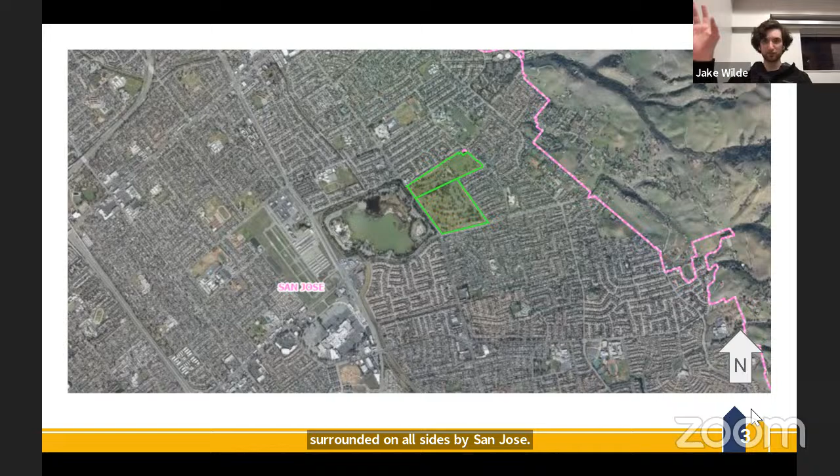And then Pleasant Hills. If you don't know where the site is, it's a site in East San Jose. It's an unincorporated pocket of Santa Clara County, surrounded on all sides by San Jose. It's next to Lake Cunningham, you have the Reid-Hillview Airport over there, Eastridge Mall. Pretty busy area, a lot going on.

Some background on the site: the golf course that has been closed now for some time operated from 1960 to 2004, so it's been closed for around 20 years now. The site has been pretty much empty since, hasn't had any other use. It was used for a brief period for grazing some animals for a time.

It was previously under this development policy called the Evergreen East Hills Development Policy, which, due to traffic concerns, sort of limited the development in this part of San Jose to projects that couldn't have more than 35 units to a site, and you had to meet some very abstract and complicated criteria to be able to reach that number even.

Then just in 2022, the current applicant of the proposal for Pleasant Hills submitted an amendment to the general plan asking to designate this space as mixed-use neighborhood and mixed-use commercial, from its current designation of private recreation and open space.

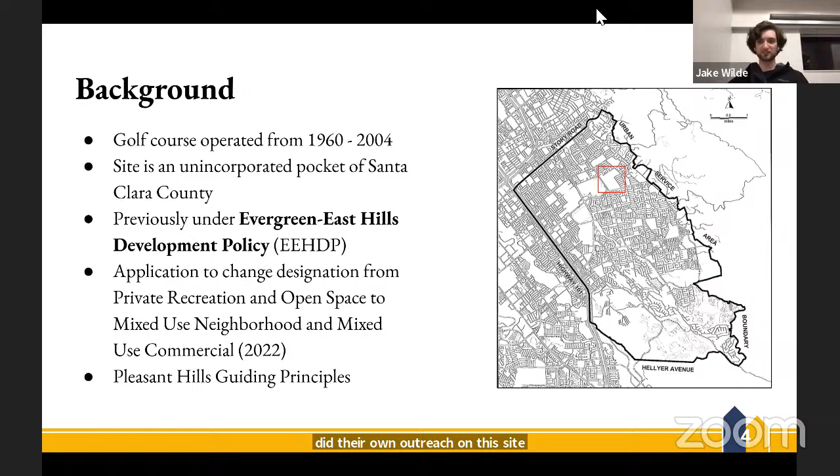And then just this year, the city of San Jose did their own outreach on this site to formulate what they called the Pleasant Hills Guiding Principles. This process took place all during this year. There was a series of meetings, and the purpose of this document was to go out into the community, get feedback from residents, and then make a document on the city's end that basically was a collection of principles to guide the vision for Pleasant Hills.

So this is the community's vision for this site, this is what they wanted to see. They got information on all sorts of different things: density, the affordable housing component, parks, transportation. This was done over the course of 2 rounds of workshops.

And then the guiding principles went through the Planning Commission and City Council, and they will be used in some manner to assess whatever that final proposal is. When the project comes to hearing at the City Council, they will be using this document as some sort of criteria by which to assess the project.

And that gets us into the proposal for this site. So there's a map of the land uses over there on the right. The site in total is 113.5 acres.

The developer is proposing 1,716 units, 342 of those are affordable. There's a teeny little mixed use component, and it also comes with these 3 new public parks. One of these is a linear park running the length of White Road along Lake Cunningham there.

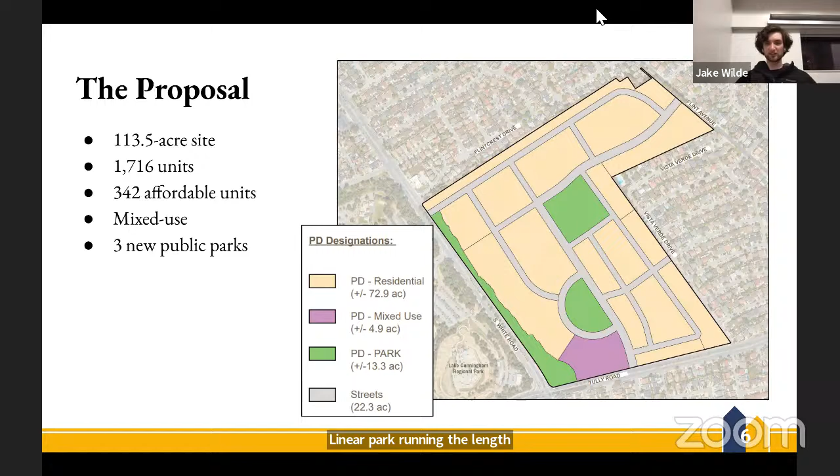Here's the breakdown of those units. We do not have information on the bedroom counts for the multifamily housing, but as of now, there are 359 single-family dwellings that will be on the site, 655 townhomes - what they called stacked flats, also called clustered townhomes - 360 of those, and then 342 mixed-use multifamily units.

Those are, if you're looking at the map here, the purple structure labeled with a 3 in the lower portion of the site there, on the corner of Tully and White Road. And in total, that's 1,716 units.

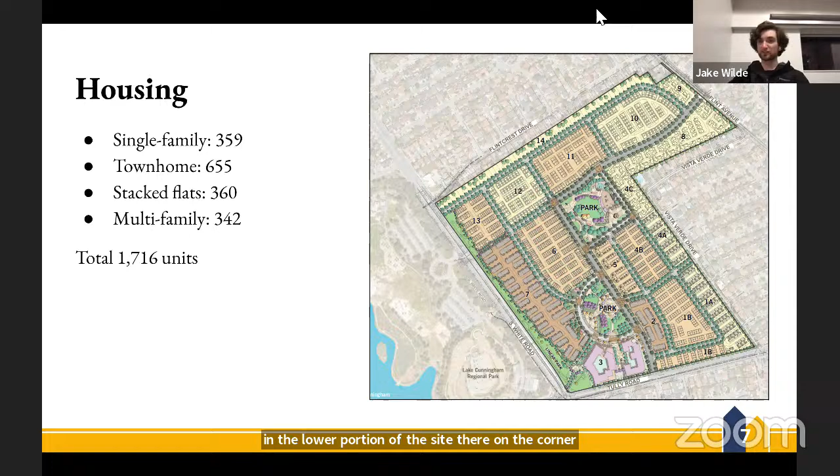This is just a breakdown that we can come back to later if anyone has more in-depth questions about where those are throughout the site. It basically breaks all of that down.

The project is early in the design process, so they don't even have any sort of renderings for this project yet submitted to the county or the city. But they did include these wonderful photos for references of what it might look like. So this was their reference for single family homes, and then of course, the reference for townhomes on this site.

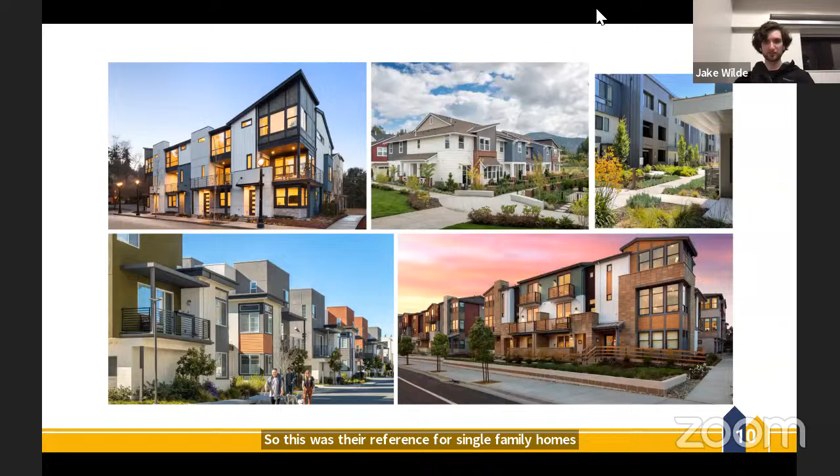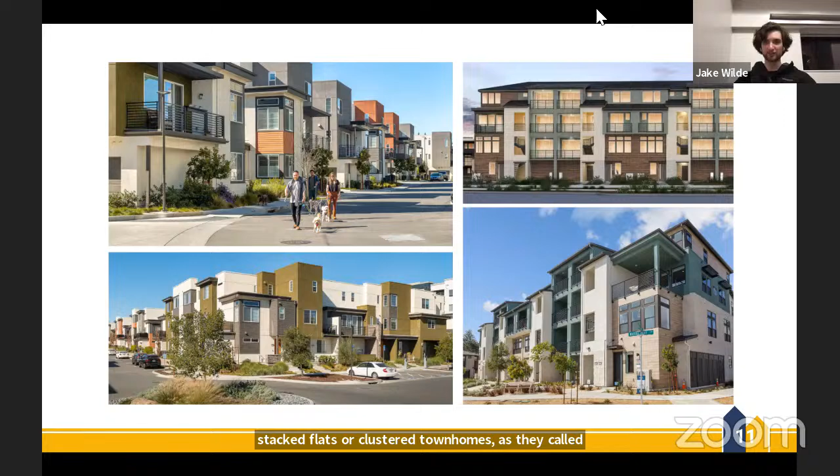And the reference for the stacked flats or clustered townhomes, as they called them—a familiar sight in San Jose. This was their inspiration board for what that mixed use multifamily component will look like, again very familiar for those of you who've seen a mixed use project in San Jose.

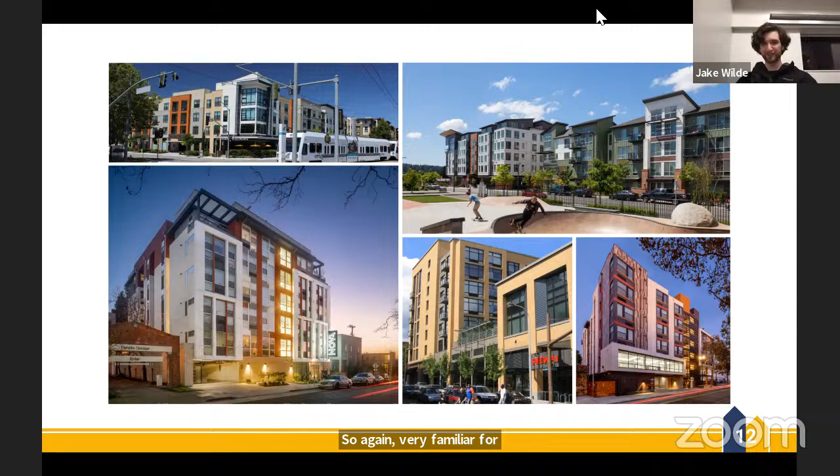In terms of affordability, the project as currently submitted to the county is 20% affordable. So 342 of those units are affordable rentals, while the remaining 1,374 units are market rate for-sale units. You can see the breakdown of household incomes for those units: 228 for very low income, and 114 for low income households.

The commercial mixed use component will have up to 50,000 square feet of neighborhood serving retail. In their proposal they list things like restaurants, coffee shops, grocers, offices, medical uses, higher education, and community gathering spaces as what they envision for this neighborhood serving retail component.

Here's a breakdown of the parks: 13.3 acres of public parks, new public parks with this. While it is currently under the general plan designation as private open space and recreation, the site as it exists now isn't currently used for that. So these would be 3 public parks: one linear park on the Lake Cunningham side, and then two more central plaza parks.

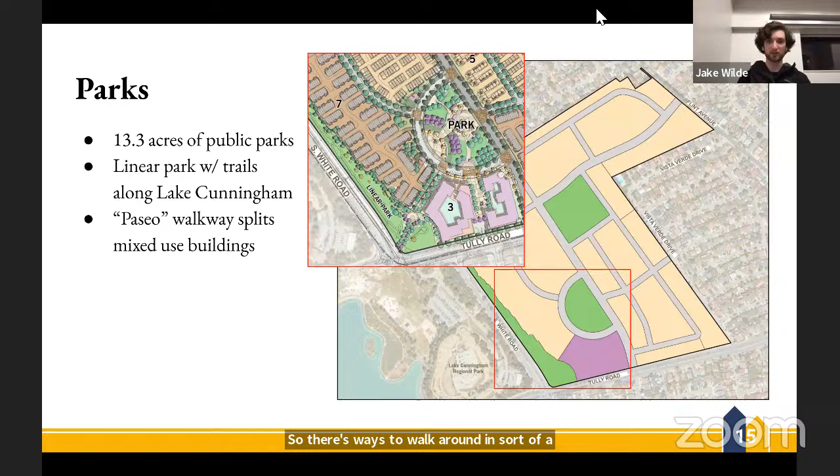As far as things go, that's all the information we have on this project right now—that's what the developer has submitted to the county. There's some process where they've submitted this project both to the county and the city at this time. It's important to note the city has already done a lot of outreach and engagement on this site, drafting the guiding principles for the site. So a significant amount of work on the city's behalf, and hopefully the developer will continue to provide further details to the city and see how those line up with the city's current expectations for the site.

I'm good to go ahead and take any questions you all might have about this site. There's maybe a couple of details that I didn't include in these slides, but it captures almost everything.

And if you'd like, what is the number of, like, multifamily, single family homes, townhomes, and mixed use? What is the exact number again? Yeah, so single family standalone dwellings, that was 359.

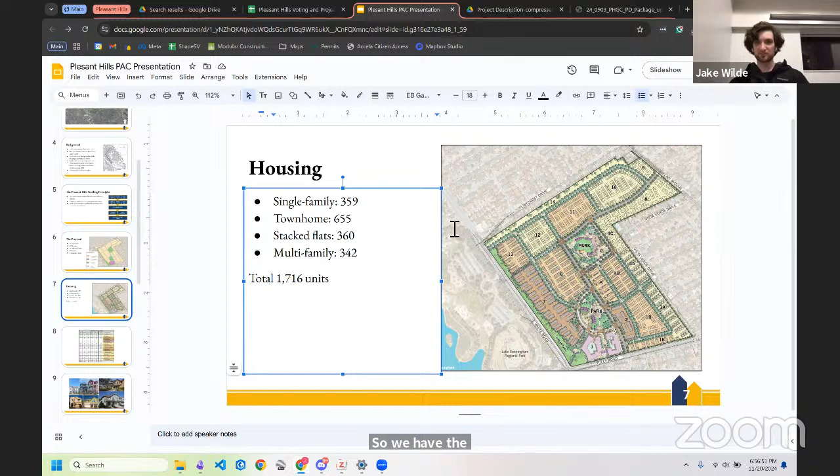I can actually bring up the plan sheet here. It has this breakdown on the right, but I went through and did the math, so I think this is a much better summary of the exact typology of housing you're seeing here. So we have 359 single family homes—that answers your question, Sandhana—and I can leave this up if you'd like to take a look at the breakdown of where all these units are and the types of housing here.

The overall gross density of the site is 21.9 dwelling units an acre. So I'd say that's on the lower side of infill projects that we look at here.

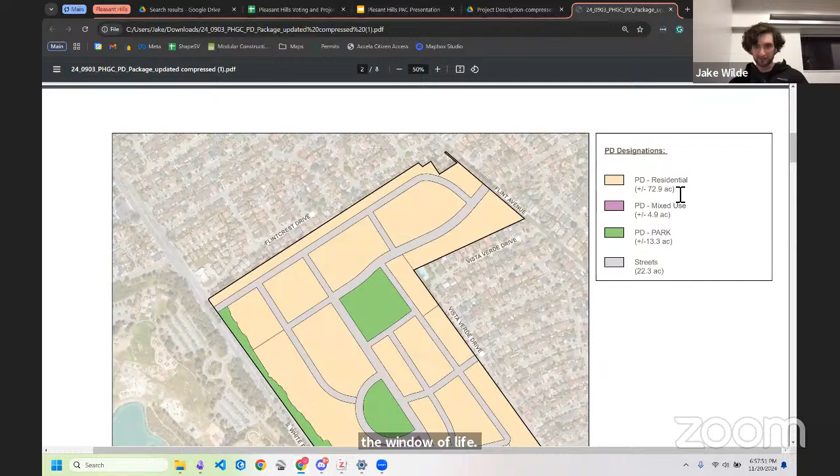You said 21.9, Jay? 21.9, yes. What's the math on that, can you tell me? That's the dwelling units per acre here on their residential unit allocation. So we had 72.9 acres for residential on the other slide—is that not right? That previous slide says 72.9 acres of residential. Here from their own summary, residential is 74.4, and their gross density breakdown is 21.9 dwelling units an acre. It seems like it's a little higher than that, but anyway, okay.

Is this little spreadsheet the one that they provided? Yes, this is what they submitted to the county, and this is what I was able to get from them. I thought it was lower, Casey—I thought it was 15 to 17.

Okay, I could do some reverse math and see if they're doing it with the total site acreage, the 113.5 acres, or if they're just doing that of the residential space.

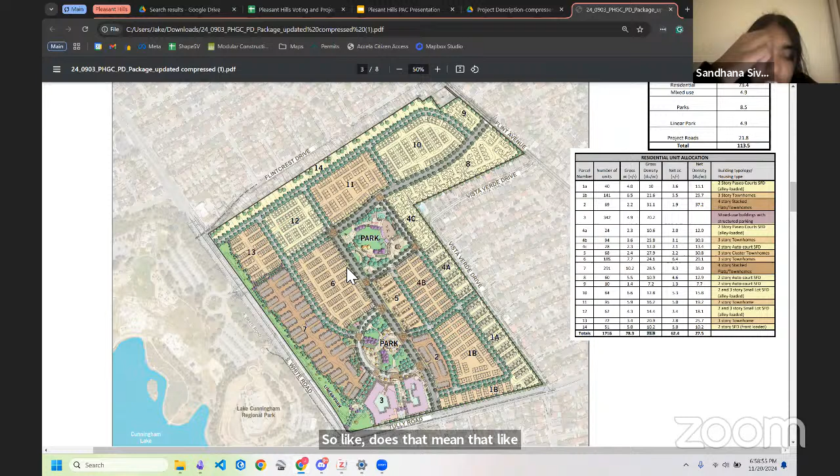Oh wait, so this is surrounded by single family home neighborhoods. Does that mean the outer part will be lesser density compared to the inner part of the project? Yeah, that's how they've laid out the housing typologies. The yellow along the edge of the site, interfacing the existing single family homes, those are all single family dwellings. And site 12 here, if you can see my mouse, is also a single family dwelling, that yellow color.

I think if you take the overall acreage, 113, and divide by those units, you get like 15 units an acre. However, you do have to account for parks, roads, mixed use. So looking at just the residential development acreage and dividing that by the units is how I would look at it. And even then, even if it comes in at say 21 to 23 units per acre, I do think it would be great to see more density on that acreage.

So I guess that's where I would start with my feedback. They have a pretty high percentage of single family homes, and you all know the Bay Area in general and San Jose also has to create more housing. So I think it's a great development, I like the idea, but my biggest feedback would be around getting more density in the residential development, maybe fewer single family homes as well.

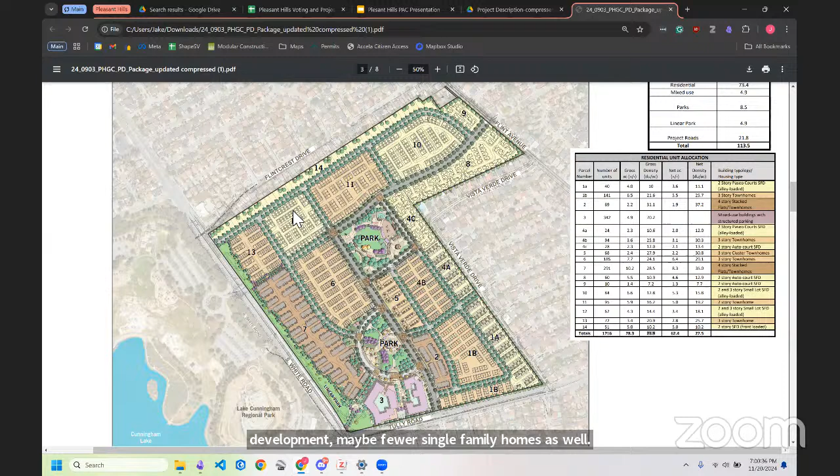Well, I would like to add that the developer has not found a way to reduce the VMT, the amount of cars that the site would create. They have not considered any alternative option. One viable option is VTA's express bus service, currently used by corporations, but most likely it could be used by the developer to ferry people to and from Eastridge and whatever site is voted.

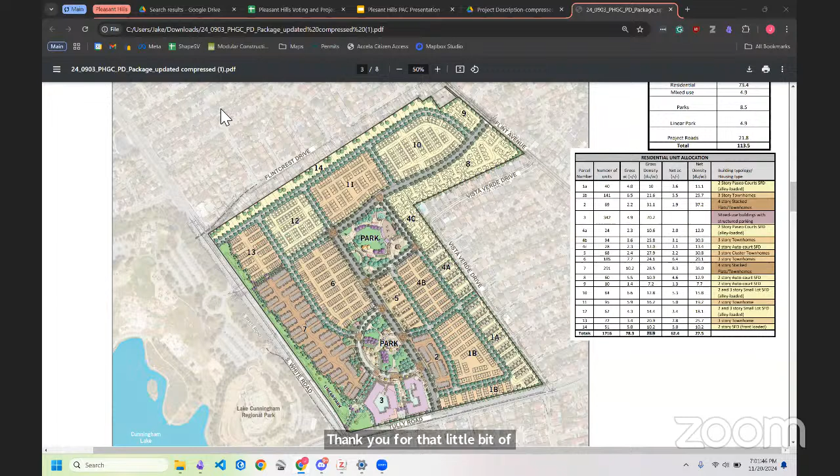Thank you for that little bit of information, Kyle. I need to quickly transfer my room here at the library to one that I'm allowed to be in, so I'll be walking for a second here. I can try to answer any other questions while I'm moving.

Jake, do you actually have access to the guiding principles report? Yes, you can look it up right now. If you pull up Google, it's the Pleasant Hills Guiding Principles, and you can look over them there.

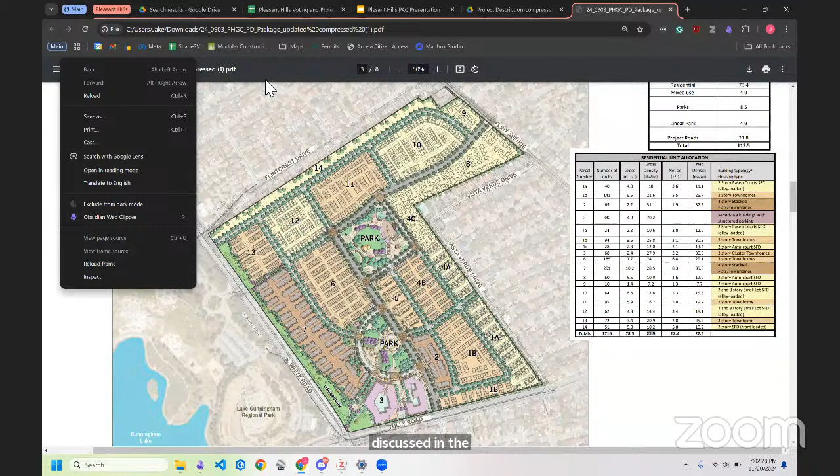I can recap some of the things discussed in the Pleasant Hills Guiding Principles in just a second. I've got the link, Jake, I've got the link here, I'm just going to put it in the chat function.

Because I assume that they're working with that, and it sounds like they did a lot of research or outreach to the community, I would guess that the type of development and the density is reflected from that report. Is that accurate?

I can't say which came first. This proposal, I believe, has been around in this form for a while now, before the guiding principles were finalized and finished. But one of the guiding principles in terms of density, what they were looking for from the residential component, was lower densities.

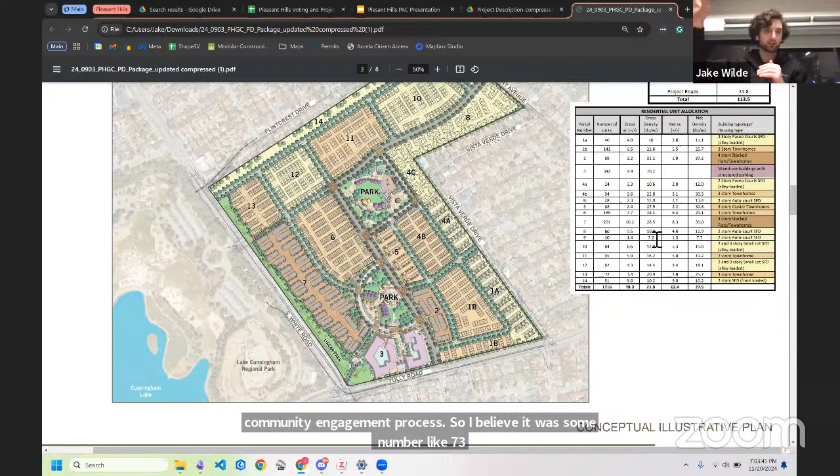The density preference from the guiding principles was brought about by rankings of different types of housing during the community engagement process. I believe it was some number like 73 attendees ranked single family homes as their number one priority, whereas high density housing was ranked by like 7 folks as a preference to include. The exact question was to include, exclude, or okay either way, a Likert scale. Only 7 chose to include high density housing, 73 single family homes, so it was about 80 people altogether.

Where did those 80 people come from?

That is... or maybe it was more. Great question. It was more. I don't know why the rankings break down differently for the different types of housing. That was just for those specific ones.

They came from the surrounding community mostly. It was noticed around the neighborhood. The city directed an outreach group, and the city had the consultant Placeworks handling this process for them. They also had outreach with two other organizations to draw in the Hispanic and Vietnamese communities.

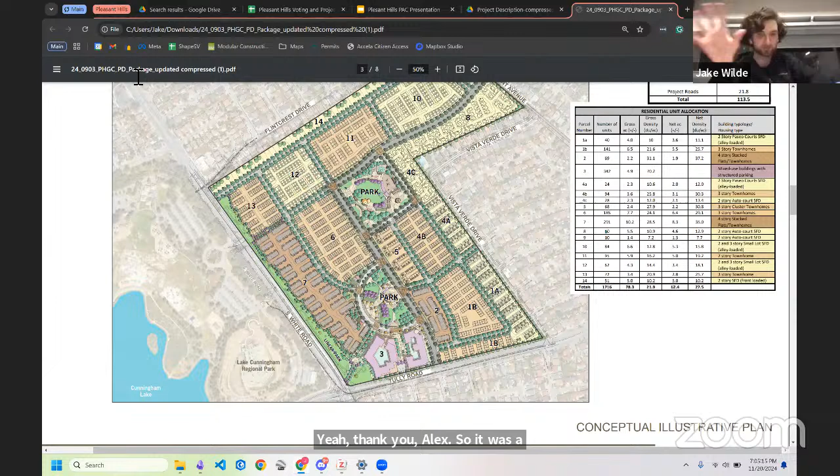I believe it was the Vietnamese Roundtable? Vietnamese American Roundtable and Latina Coalition of Silicon Valley. Yeah, thank you, Alex. So it was a pretty expansive effort to engage residents nearby.

Well, it's no surprise most people don't advocate for high density, do they? No, yeah, I don't think it is. Well, hey, it makes sense considering they only grew up around extremely low density.

Carlin, did you want to jump in? Yeah, I attended a bunch of those meetings, and you know, the YIMBYs or the NIMBYs were really out in force there.

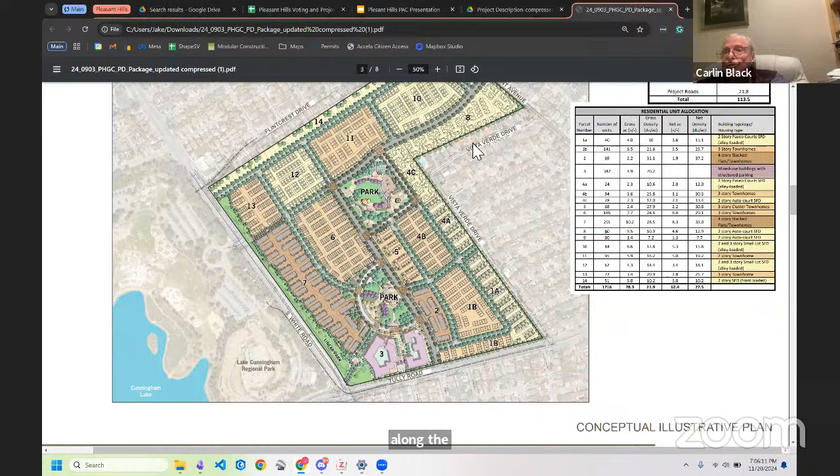I can certainly see that along the existing neighborhood on Vista Verde Drive and so forth, that they can put single family housing there. But I think the interior spaces on that site should really be something a little higher density than what they're doing.

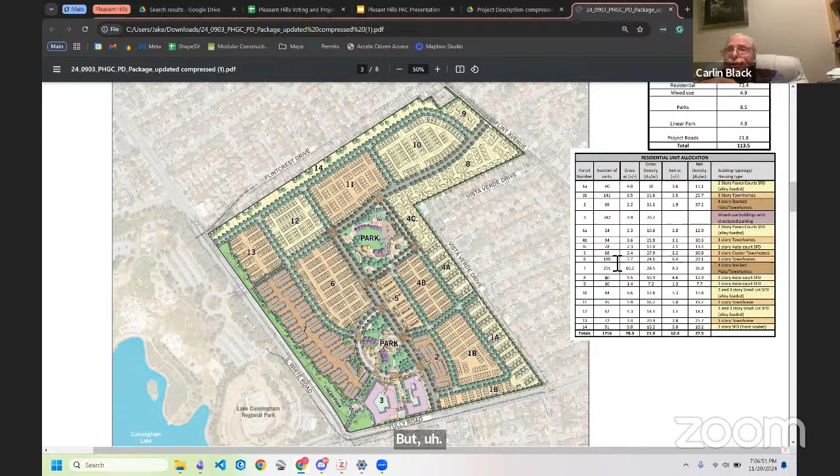I don't understand what this two-story Paseo Court is, but I think they should be using that for much higher density housing. You know, sites 12 and 10 in particular.

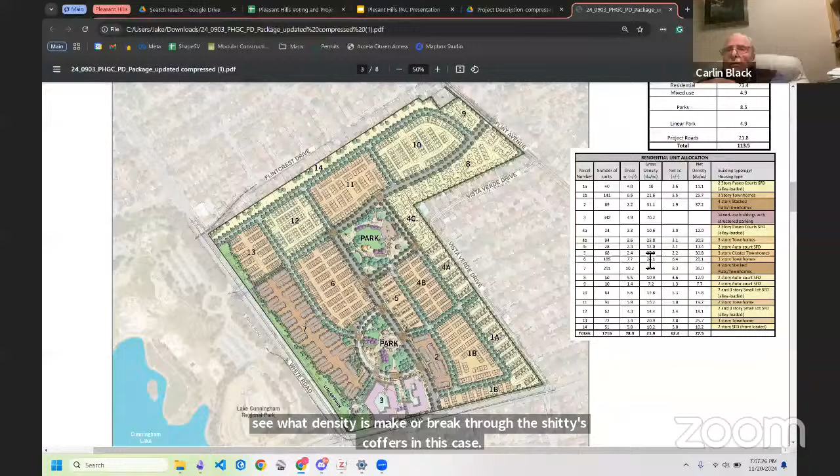Something that's coming up in the pipeline that we're paying attention to is the city of San Jose will be doing a report on the financialization of land use at this site, to see what density is make or break for the city's coffers in this case. So we'll be paying attention to that and seeing what number they derive as being ideal for this project.

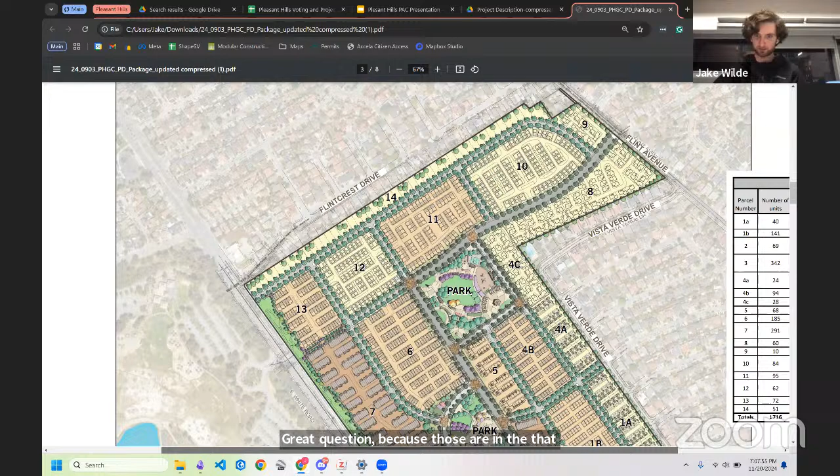And Jake, on the Flint Crest Drive side of the property, are those just open space lots there? What's on the very edge? Great question, because that is site 14 shown in the yellow shading here, so it should be single family dwelling units. It's just not graphically shown the shape of those units there, but it is.

51 two-story single family dwellings. Okay.

Yeah, well, I can see why they put single family around the edges there, and it kind of makes some sense. But I agree with Carlin about those interior lots - they could be perhaps higher density on 10 and 12, certainly than what they're currently demonstrated for.

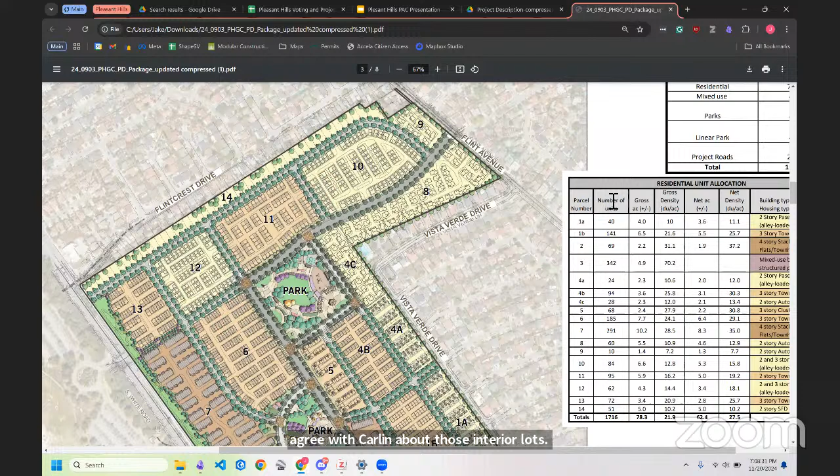One of the things I've suggested to the developer, and maybe we can have a discussion today about doing some redesigning ourselves - we know we've got some community opposition that lives near the project, as we often face. Meanwhile, many advocates, I assume like many of our members here in the room, want to see greater densities.

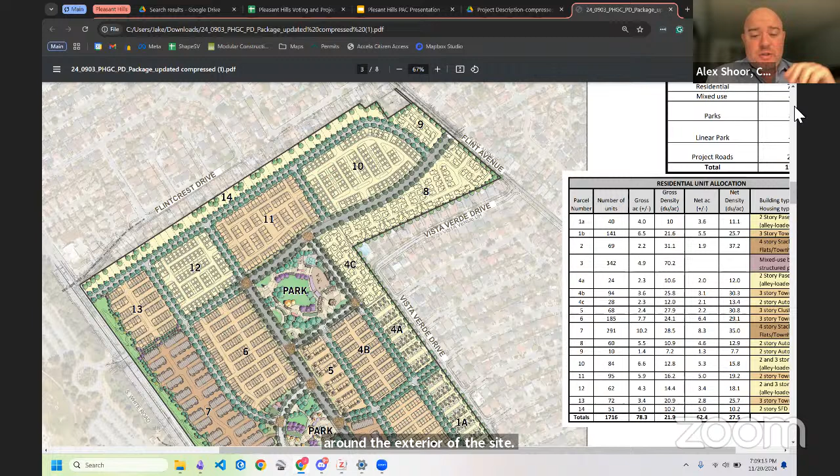So what I've suggested to the developer, and I would love it if we could take an official position on this if folks agree, is creating a green belt around the exterior of the site, like they've done on that one, the western edge I think. Jake, yeah, on the screen here they have the linear park along the edge here.

Yeah, and so my suggestion is - Jake, if you could screen share that. Oh, is it not sharing that? No, darn, I have been gesturing to my screen this whole time. Well, I can see it. Thought I saw it. Oh yeah.

I would really like to see more densification of all of those interior sites, instead of a 4 or 5 story - instead of 4 stories, go 5 stories on the flats and townhomes. The 4-story stacked flats and townhomes - it seems to me that they could stack that a little higher and get some more density in there.

Alex, were you suggesting along the lines of taking that linear park and doing more of that on the other low density edges? And then eliminate more of those single family homes and add in more high density there? Yeah, so what I would suggest is the parkland be concentrated on the exterior.

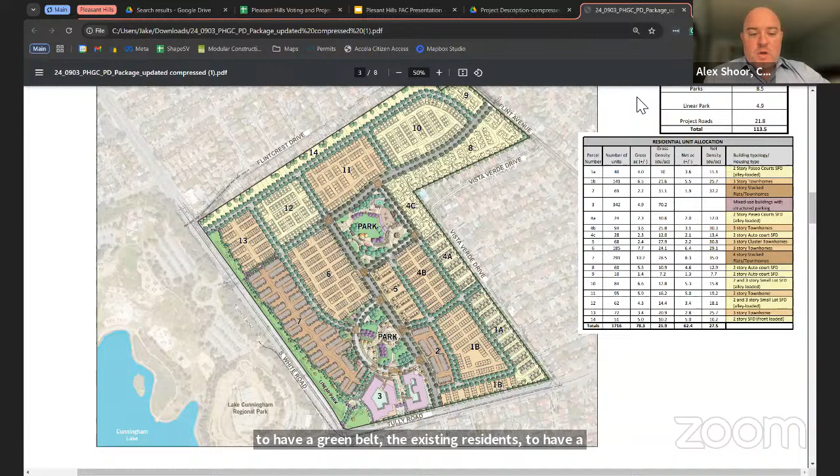This would create a buffer between the density and also maximize community benefit for residents, giving existing residents a green belt that would buffer them from density, but also something they could use to bike, run, or walk around. That would entail probably eliminating those two park sites in the middle, concentrating the park on the exterior, and putting the density in the interior of the site with multi-story buildings, potentially 10 to 20 stories, to get some real density on that site.

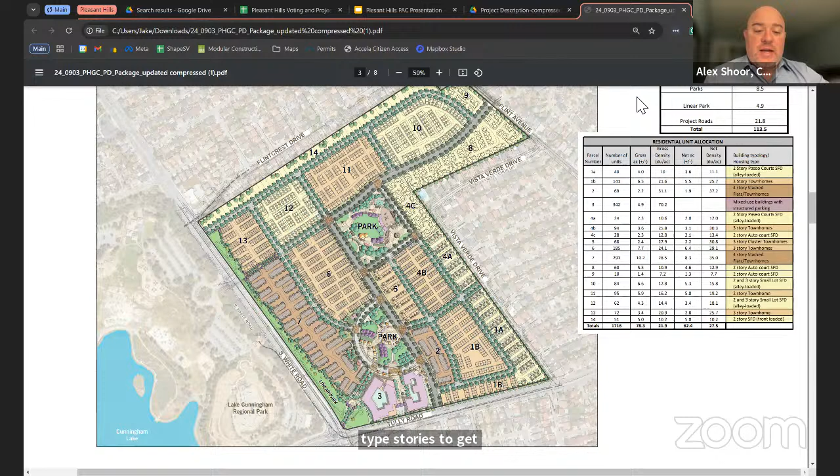If I can add one thing, I don't think we should be shrinking the two parks at all, because currently that general area, including the neighborhood, is lacking in open spaces. So in a way these two parks are satisfying that open space need. I agree, and I think the development would be a bad one without those interior open spaces to break it up. But that doesn't mean we can't go higher density on where we are developing.

It's still a valid question of reducing some of that single family housing and doing a perimeter, a narrow park. Narrow parks are not as useful as those other two spaces, but it could be a nice loop for walking or running, as you said, and it's visual to the people around it as well. So it's still worth exploring.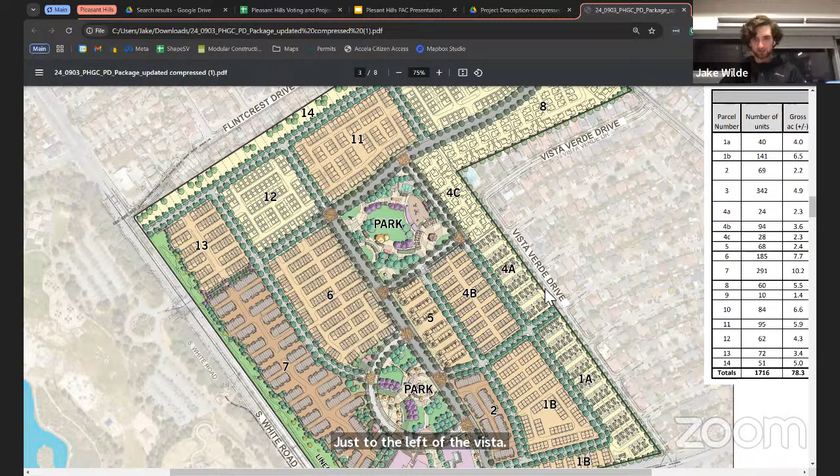Can't really see these street segments here, but they did mention they were trying to integrate the houses and the street network with the existing community. In other places where something like that has occurred, residents have -- I forget what example it is, but it's by a school -- the residents illegally put up a fence and a gate and locked that gate. Is there a way to prevent that from happening?

I assume there is a way to prevent that from happening, and I believe that would probably be on the city, depending on the ownership of the streets specifically. I imagine they would be city streets, but I am not sure.

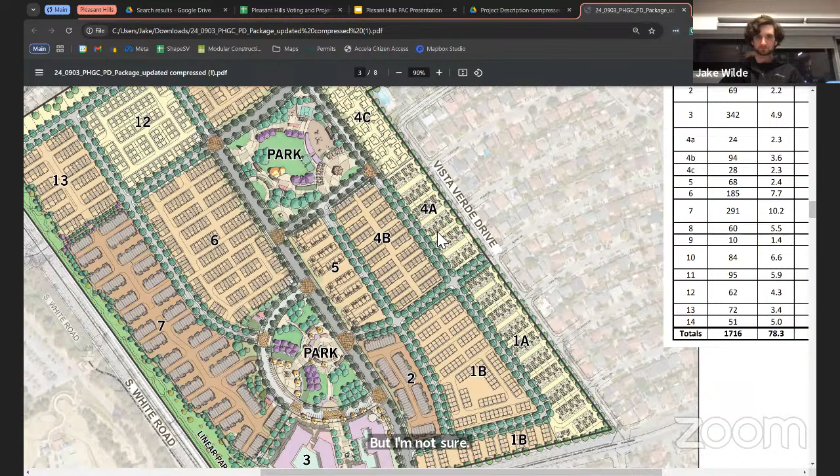What is there, like, a transportation demand management program for this? Will they offer more bike lanes around the trail areas, more bus passes, or improvements along Tully and White Road? These are all great things and probably things we should suggest, because they have not submitted, and there's nowhere a current map of that transportation demand management plan.

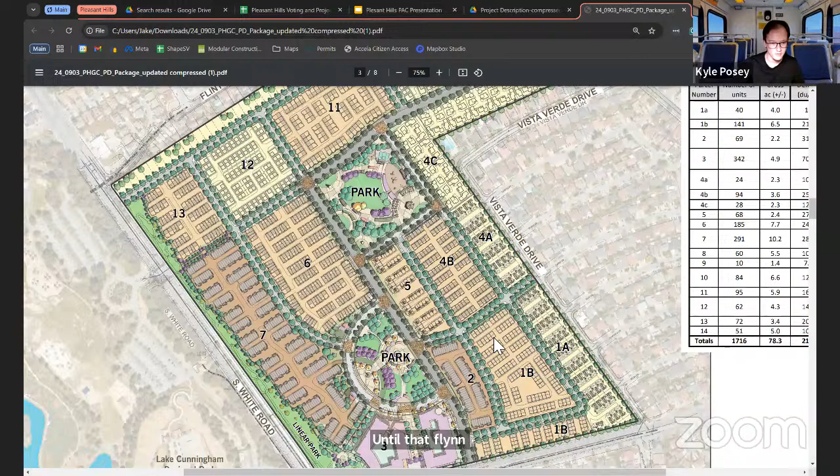I do know with other projects the developer is required to improve the existing streets in the project zone. So that would include South White until Flint Avenue, and also Story until Vista Verde -- I mean Tully until Vista Verde.

As part of the TDM menu that San Jose has adopted, the developer has to earn a certain amount of points on that menu, and there are many options developers can pick from to earn those points. So those can be improvements to the roads, different types of bicycle infrastructure improvements, bike storage, bike racks, transit passes, and any number of things. So those are all things that are still unclear at this time as to how the developer will be working with San Jose to meet those requirements.

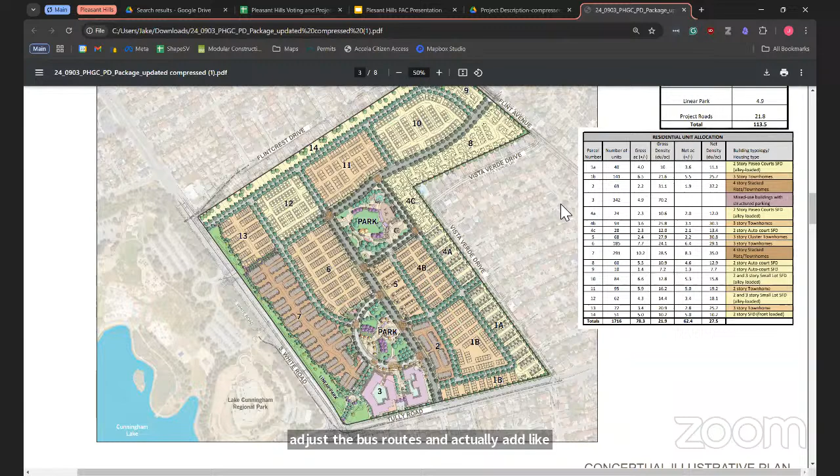Can the developer also work with VTA to adjust the bus routes and actually add bus stops that are right adjacent to the project? Because there's none directly on any of those blocks that the property is adjacent to, it appears to me anyway. Is that something they normally would be able to do?

For most projects, that's not something I'm familiar with. You'd have to have a project with a pretty big footprint in terms of the number of households and people you're bringing into the area to broach that negotiation with VTA. I also don't know what their policy on that might look like.

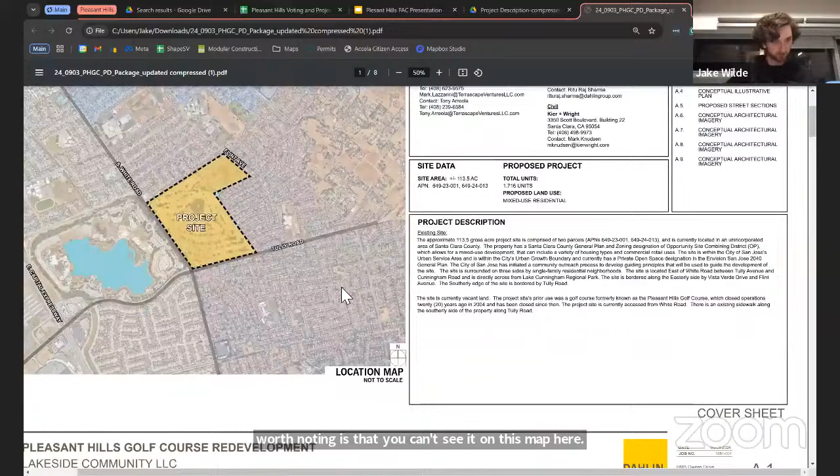One thing worth noting, though you can't really see it on this map, is that VTA's light rail orange line is currently being extended further south along East Capitol Expressway. It will end at the Eastridge Mall Transit Plaza, with a station coming right around the intersection of East Capitol Expressway and Tully Road.

What did you say was the timeline for that? I don't know the exact construction dates. It's being built right now, so I don't know when it's supposed to be completed off the top of my head. I think it might be 2028, but I'm not sure—I can look that up.

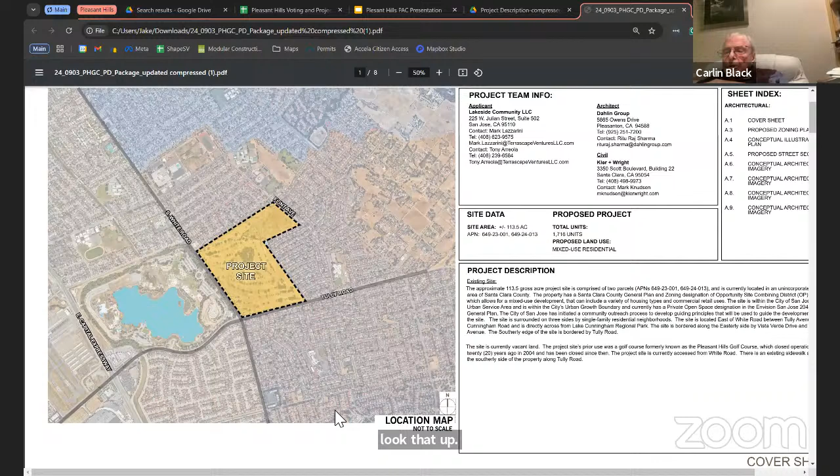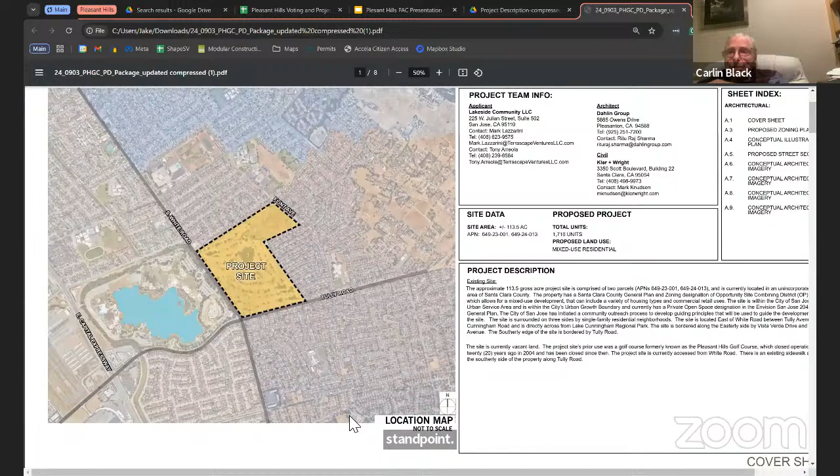Just looking at that overall site from an urban planning standpoint, that plot 5 or whatever they call it is being wasted on 3-story townhouses or whatever they're doing there. That should really be a very high density area, preferably a high rise.

I have a feeling there are folks who will agree with you. The orange line extension is projected to be complete in the summer of 2026, so probably long before this project breaks ground.

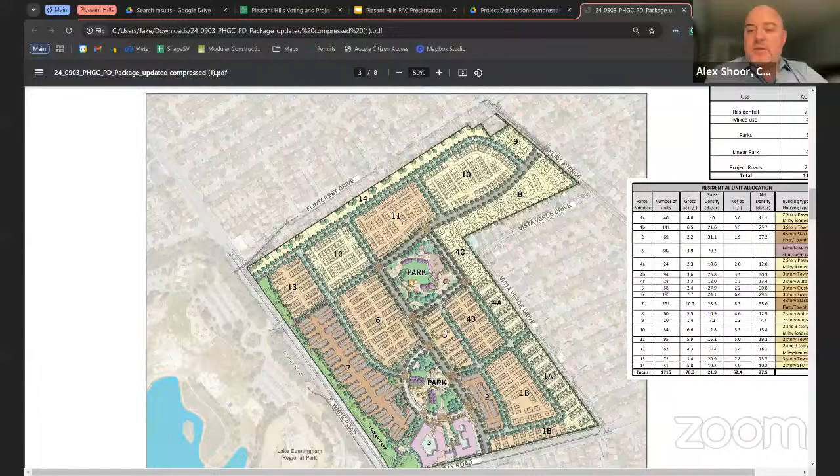Cynthia, we've got you on the line. I don't think I know you, but I wanted to offer if you had any questions or comments. Nothing from Cynthia, okay. Chris, any questions or comments? Yeah, I'm trying to think of something—I usually want to have a question.

So is this going to be all done by one developer? Because obviously it's a huge range of housing types, so it'd be interesting if it's all done by the same contractor.

The developer is Terrascape Ventures, and from what I've seen, this type of project—a mix of townhomes and single family homes—is familiar to them, it's in their wheelhouse. I suppose they could partner with a nonprofit affordable builder if they choose to do so for an affordable component, but it seems like it's just them as far as I'm aware right now.

So it's just single family and townhomes, not like traditional two-bed apartment types? There's two mixed-use multifamily apartment structures on the map, those purple buildings. I don't have a unit breakdown of those—if they're studios, one-bedrooms, two-bedrooms—I don't know that at this time.

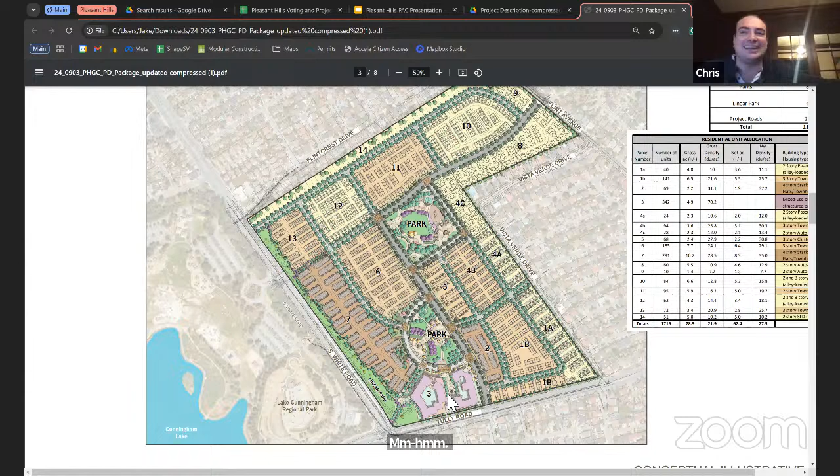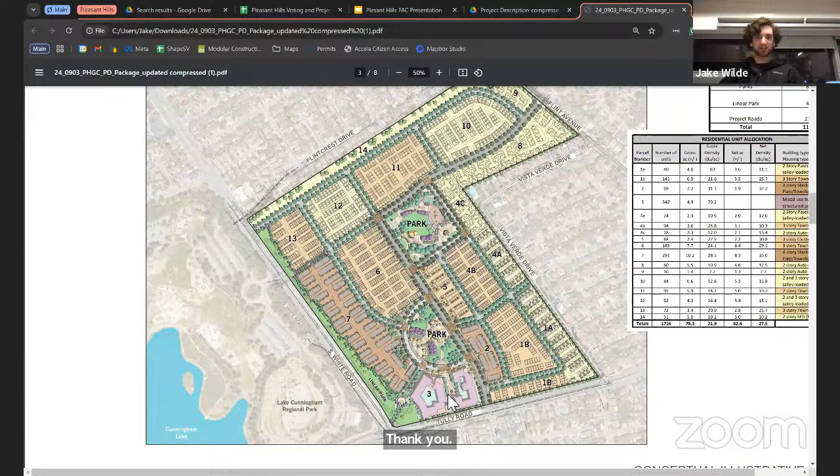So Jake, is the multifamily housing only in that number 3 area? What I've been labeling as the multifamily housing is that mixed-use area, because the other housing products they call townhomes and single family dwellings. They have slides showing what that building will look like—that's what they intend for that portion of the site.

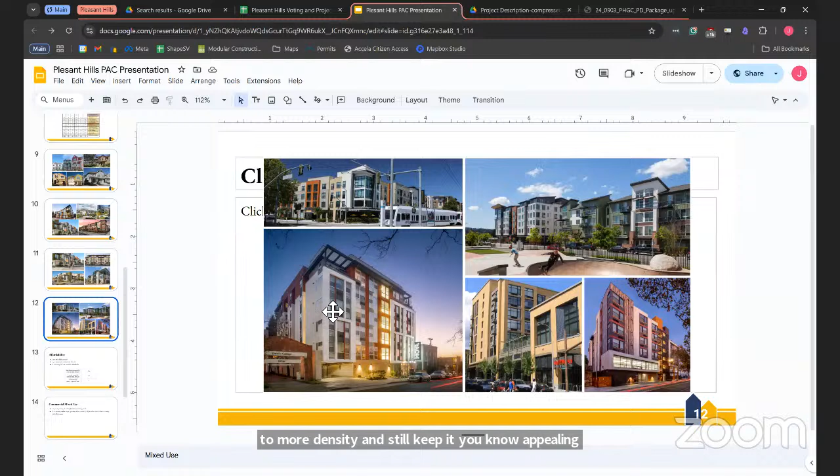I wonder if they could do more multifamily housing on that lot 5, or higher density on those interior lots. There seems to be a lot of opportunity to increase density while still keeping it appealing to the neighborhood around the perimeter. Yeah, that's definitely certainly a possibility.

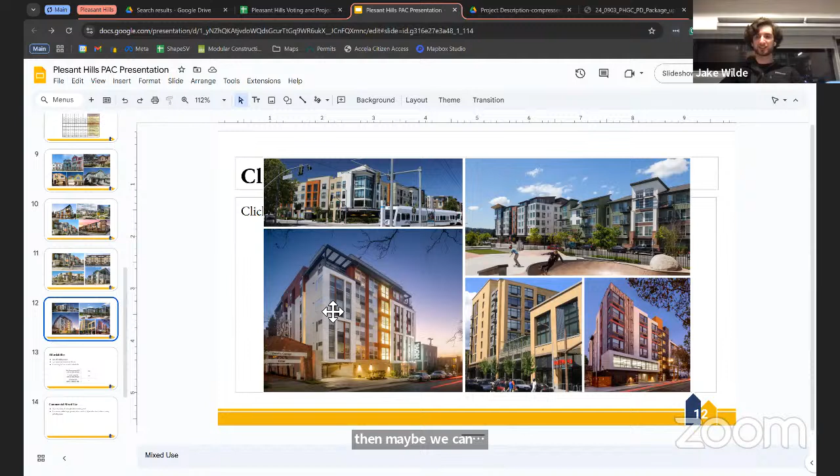If no one has any questions on the top of their head right now, then maybe we can take it off live and go into the more nitty-gritty discussion about what we'd like to see from the site and suggestions we might have. If you're good with that, Alex.